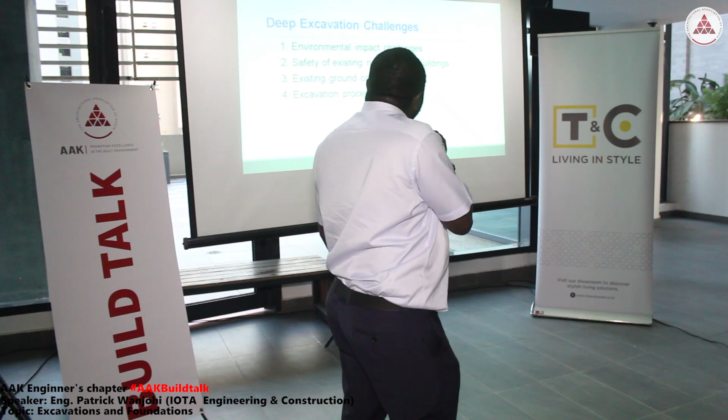This is a big topic we cannot exhaust even given a day. We need serious thought about the environment when it comes to removal of material from one place to another, because material is never destroyed, it is just relocated. Everybody needs to think about this for us to have a good environment now and into the future, and perhaps allow enough time during excavation so people can find different uses for the material, so it doesn't clog areas where we'd dump what we don't need.

Another challenge we always see is when there are very close structures previously built, and now we also want to go below their foundations. This is a big item, and people worry: what is going to happen to my structure, or to this structure that doesn't belong to me? Will there be a legal issue coming up? It's a big worry for everybody, and people think hard about it, but solutions are there, so we're going to look at those solutions.

The other nominal challenges we have to come across during deep foundation development are things like material hardness. Sometimes we find the materials are too hard, and we don't know how to deal with it, which means more cost. So sometimes we have to think about what equipment to employ to make it cheaper. It's never very cheap, but somehow it's well done.

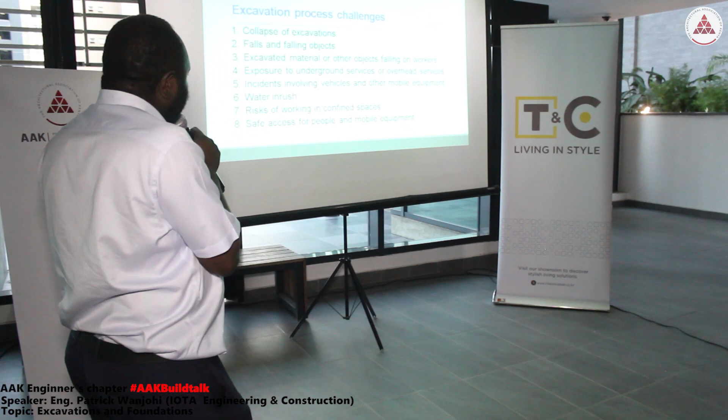Water inrush again, and confined spaces, this is also another big challenge - safe access for people and mobile equipment. Normally as you go deep, the chances of having a wide road reduce, which means there must be inherent interaction of equipment and people. A lot of care must be taken - what should be done there? This is another big issue.

Okay, let's see the solutions to these numerous problems that we have mentioned. I hope this is going to be useful now and into the future.

We could also have the solution of lateral support by battering, cutting the sides when they are inclined. This is scientific - there are specific angles for different materials to make sure the material doesn't slide down. Different materials require different slopes; some require only a small slope, others require a big slope.

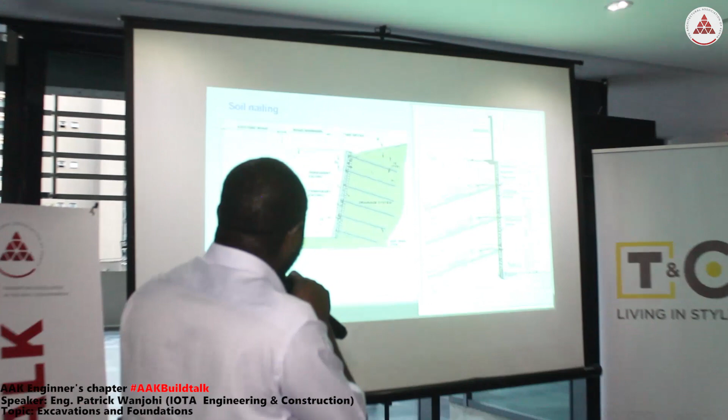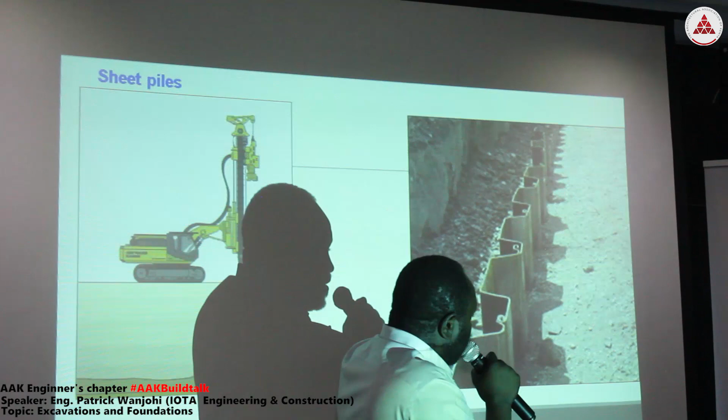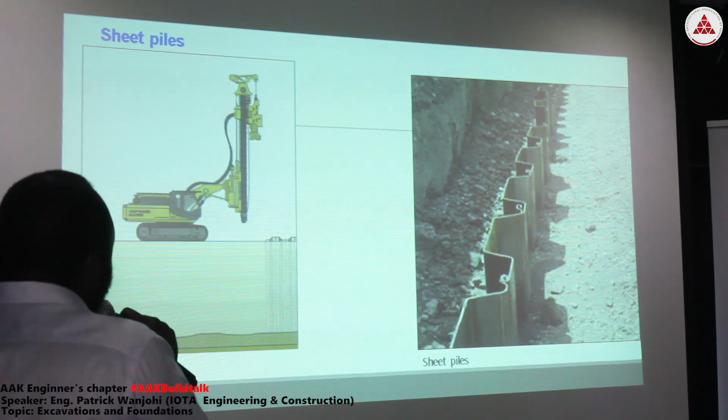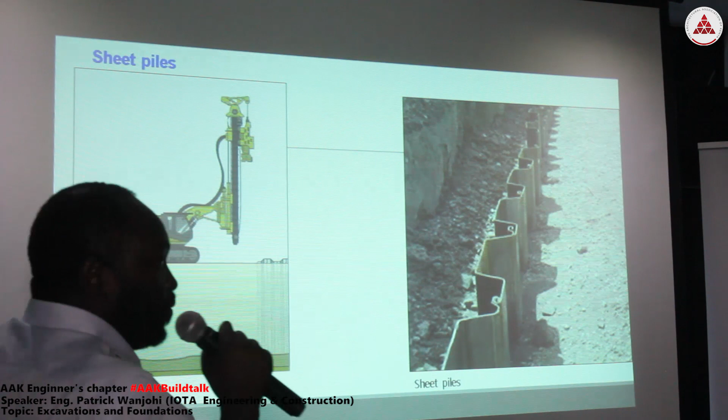Another system that is also waterproof - I could have water on one side and no water on the other side - is sheet pile. A sheet pile also requires a bit of design, and sometimes it has to be reinforced with waler beams and this kind of thing, and we need specialized equipment to drive in sheet pile. Simpler equipment are also available, and most of the equipment we're mentioning here is available in Kenya today.

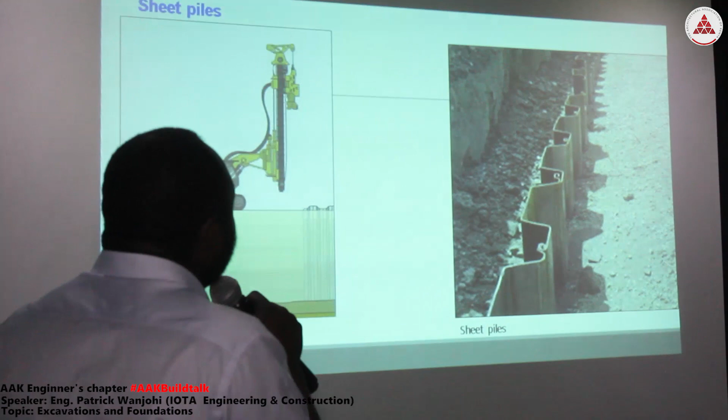So the situation is improving every day - it's not like 10 years before when we didn't have the equipment. A typical case of sheet pile - this is especially good when you are doing bridges on river banks and seashores, or if you also build on the riparian.

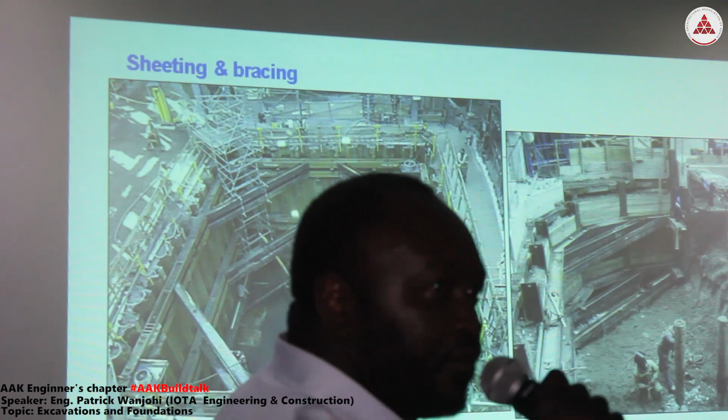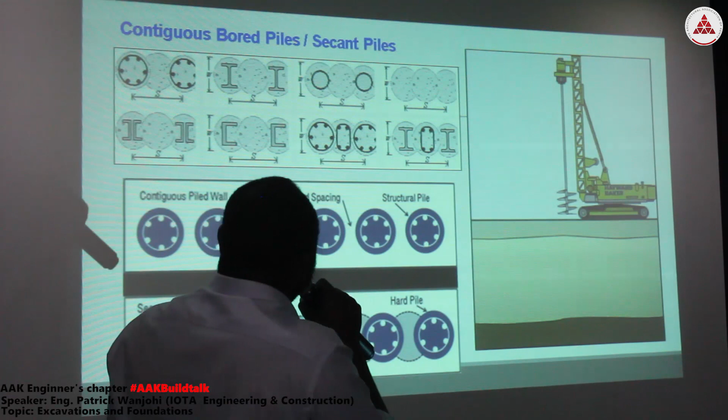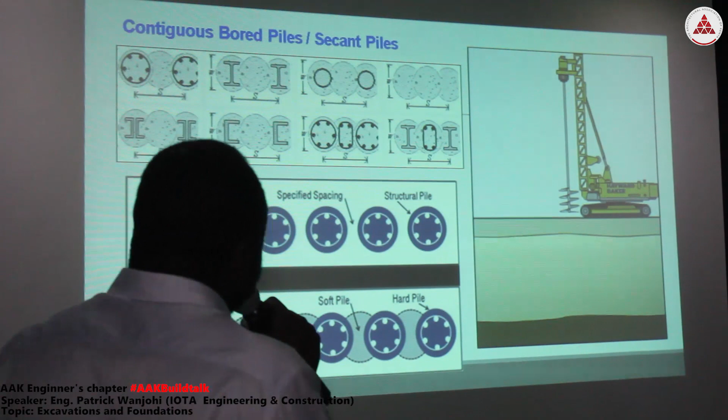The walls can be even more complicated, but combining the same things - you can have different piles, some reinforced, others not reinforced, different kinds of reinforcement, different spacing. We give them different names, but they're basically a pile system.

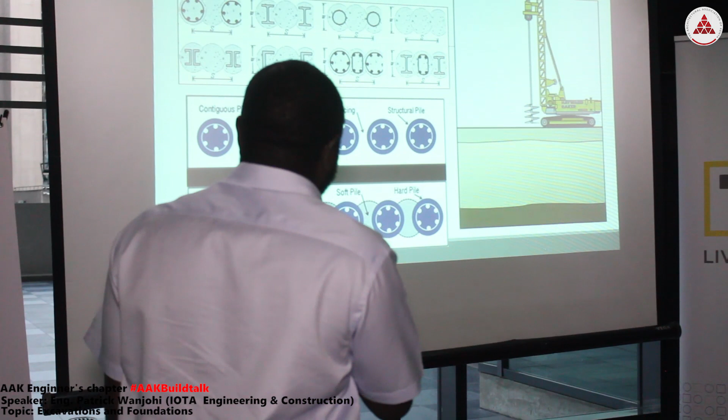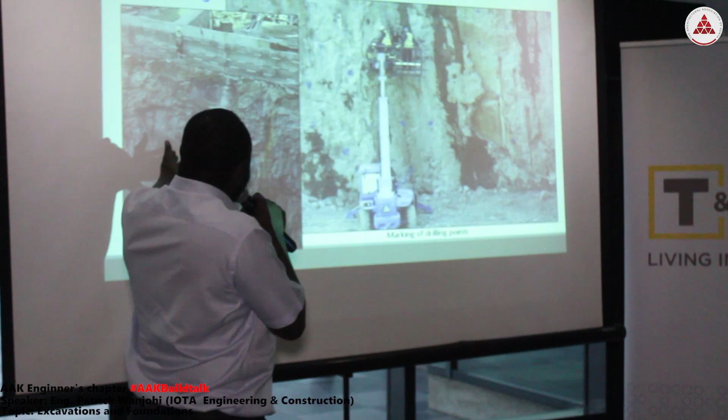Sometimes the piles can be supported by anchors to give them lateral strength. And rock bolting - this is used when you have really hard material that has fractures which may cause movement and injury to people, and sometimes can be catastrophic because the neighbor's property can end up in your pit.

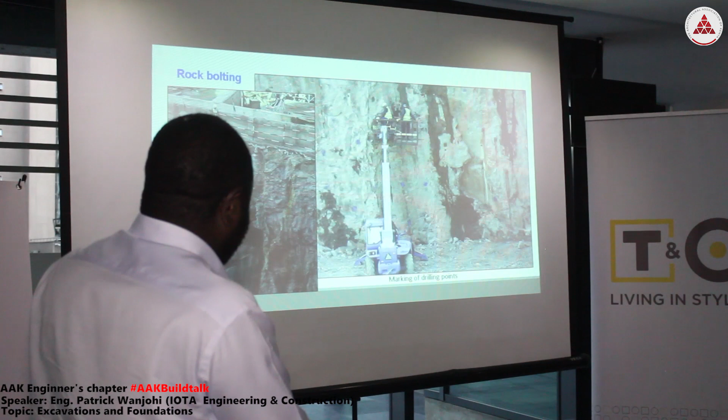It's also a bit of a scientific activity, and depending on the fracture index, the bolts can be very deep and the diameters can be big. The bolts can be small diameter, 12 millimeter up to 32, 45 millimeter - we've seen such large bolts. They can be as short as 2 meters, or as deep as 16 meters, as we've done here in Kenya.

There's a combination of the same things we mentioned - this is foundation on piles, actually 30 meters. Is this the middle section?

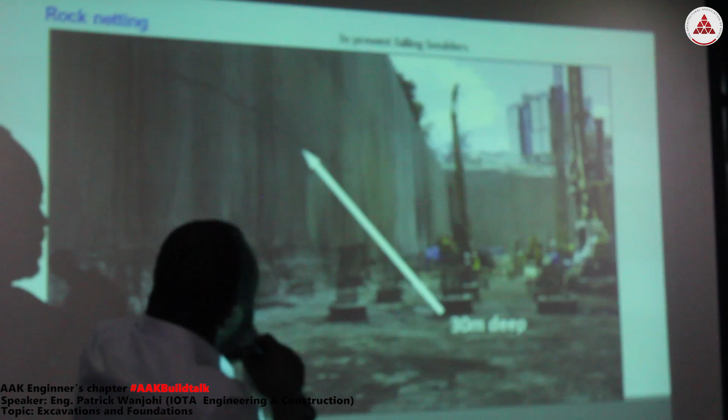It's surprising how nature can be - the material was very hard, but when we arrived here, there was need for piling, and 1 billion shillings was sunk into the piles - maybe just short of 1 billion.

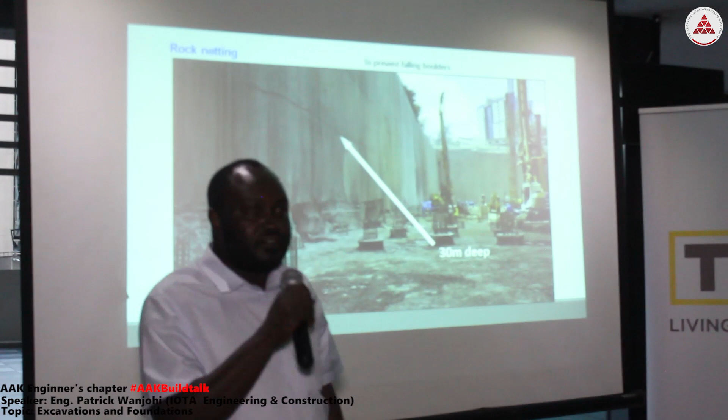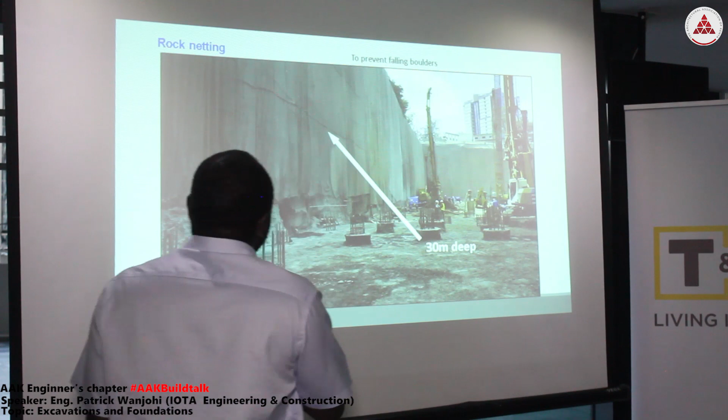1 hectare coverage. Yes, 2.5 acre. Yes, 1 hectare.

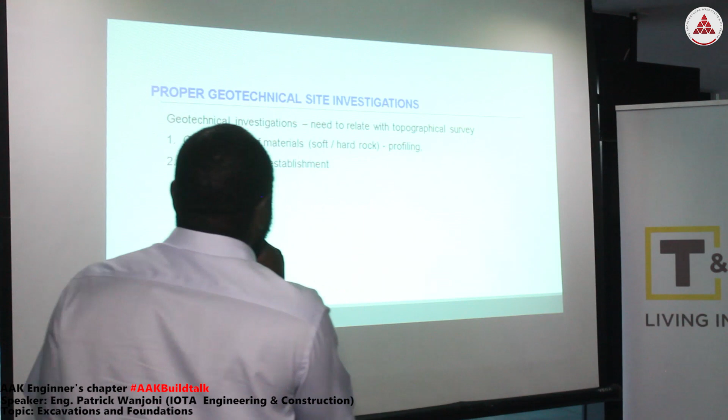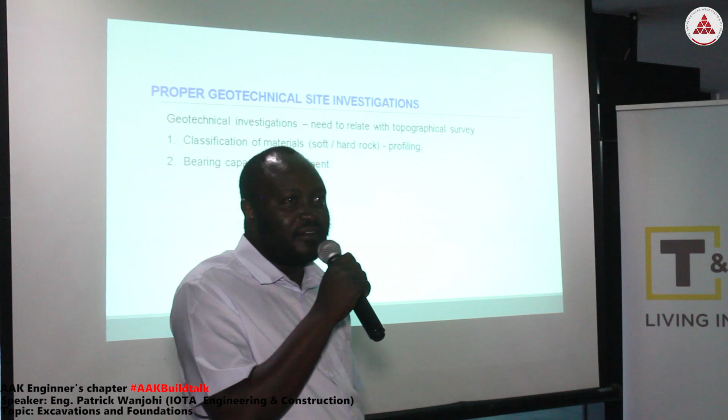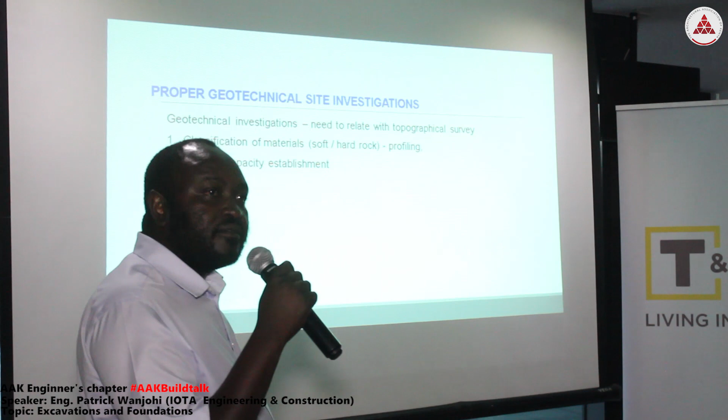The other solution to the challenges of excavation, and this is most basic, is the scientific finding out of the geological strata. We call it geotechnical investigations, and this is very important to control the ultimate cost of construction at the foundation level, and even to predict it right, so that we have good planning by the owners of the money and the owners of the construction.

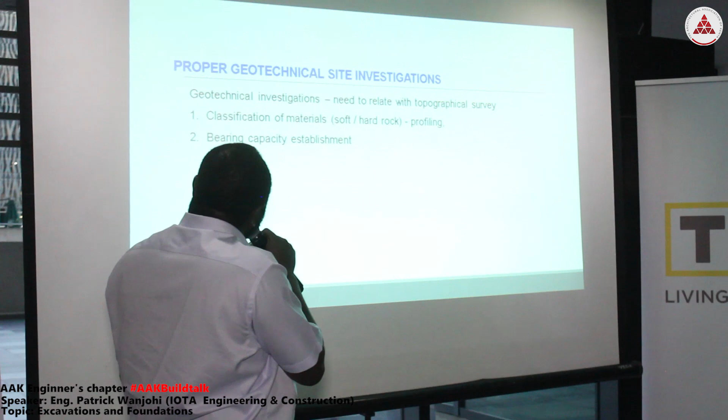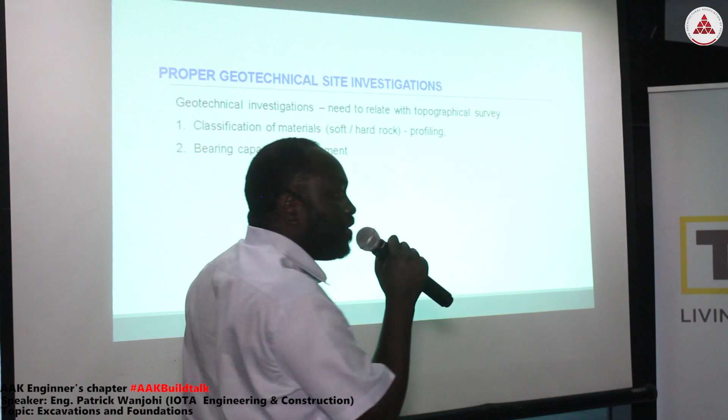The purposes of geotechnical investigations are basically classification of materials for costing, and what we call profiling. I will show that profiling in a short moment. Of course, also determination of... okay, no problem, thank you.

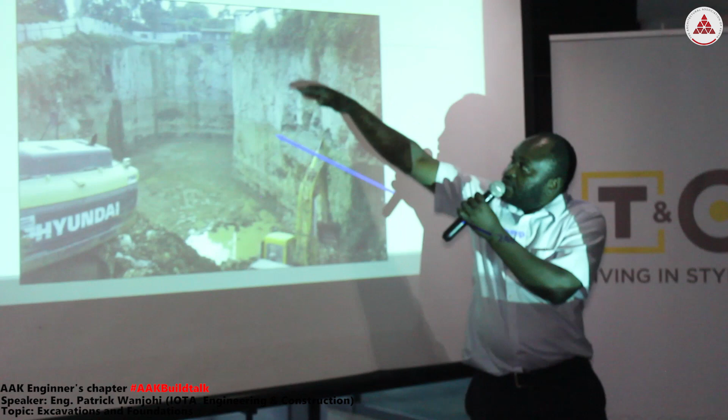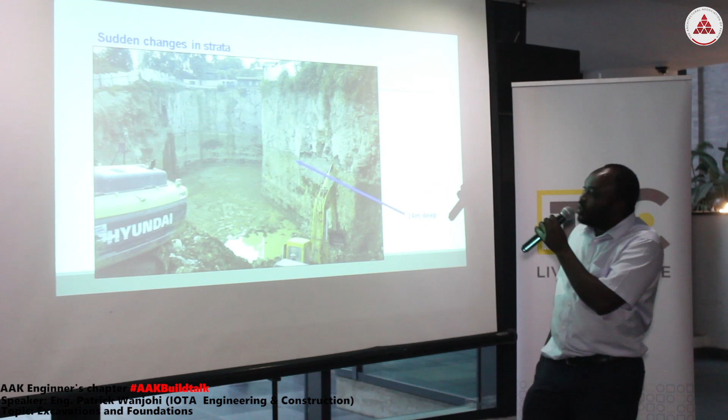So if you see, material can change fast. You had very good material, like this one, maybe up to 80 MPa, and all of a sudden, around the whole site, you arrive at material that cannot even meet 10 MPa requirement to support even a small structure, yet you had material that was very hard at the top. This is supposed to be determined by good geotechnical investigation, and also to inform the construction beforehand what to do with this kind of situation.

What we mean by profiling is like this: the ground is not even, some places are deeper than others. So when you do just a borehole at one point, you might not be able to relate at what depth is this material the same in each of the boreholes. So there is need to do a survey, the topographical survey, and relate that information with the geotechnical information regarding the depth, so that you are able to come up with something that the engineers can depend on.

You end up with a situation that informs you: on this side I have hard material, somewhere in the middle, so what best measures can I do? This is very, very important, again, in cost control.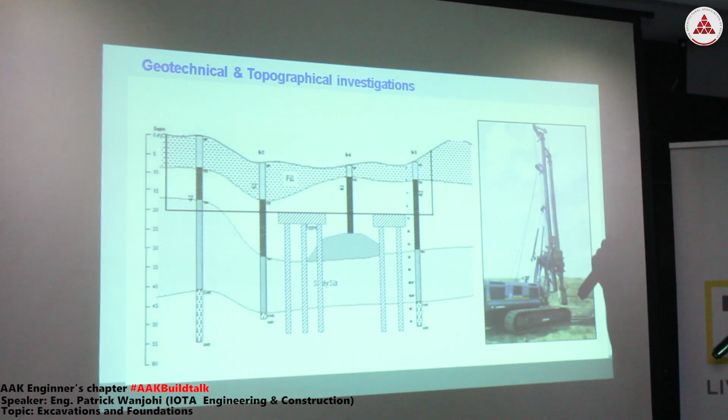One case here that we just developed, we could see a site of this nature. It is not unusual to have it like we just showed elsewhere. You might see that on one side you have good material to support your construction, other areas you don't have good material and you really don't want to go deep. Like we said, the other challenges of excavation can be overwhelming.

So you can make a plan beforehand what to do. Decide: I will use my normal pads, and in the center I will use piled foundations to support the structure. Some of these things need to be seen before excavation, because some of the solutions you need will be provided by monsters like this one. A 70-ton monster cannot be put in a deep hole and you don't know how to remove it.

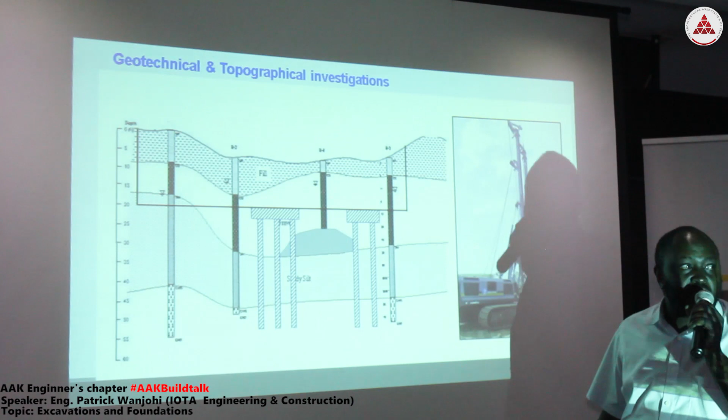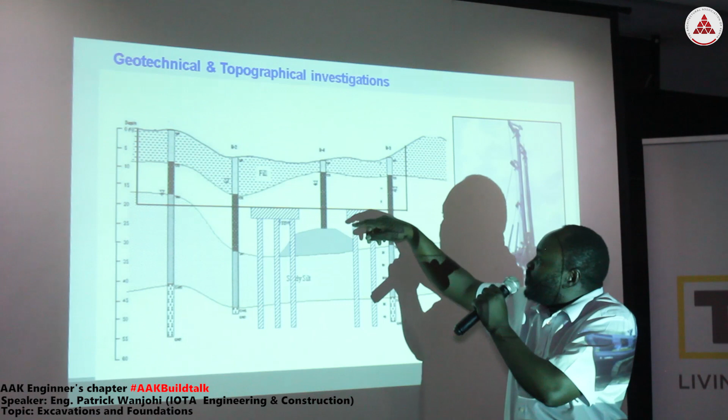So sometimes you might have to do the drilling from the top, remove the machine, and then do the drilling and installation of the pile from the top. That part now you can do when you have opened up, because that needs much lighter equipment, the ordinary construction equipment that we are using all over.

So good planning, guided by geotechnical and topographical investigations, is good for construction, especially when it has to be deep and especially when it has to be tall. The skyscrapers like where we are, I'm sure the engineers did a lot of work even where we are.

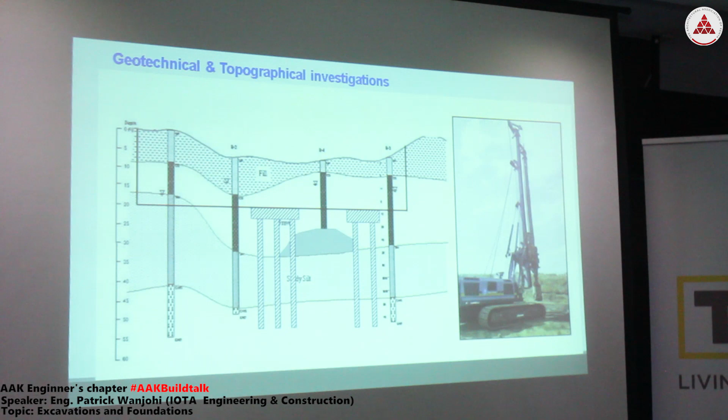I'd like to make a quick comment also. Now, it looks easy when presented, but it is not easy, and this makes me think that these kinds of subjects now need to be taken to the roots of our profession, being in the school, so that we are able to have an interaction of the industry and the developments that we are going to be having from now onwards.

And maybe probably to ask AAK to listen to our universities, so that we have much more quality graduates who understand more, who appreciate more, who can save the industry much more.

There is a good way of doing it. It's about understanding the equipment. Everything boils down to equipment, availability of equipment, and not just the equipment but also the expertise to do it safely, because construction is all about improving the quality of our life. So when we lose a life, we have lost the whole point. I would let AAK deal with that, and where we can as individuals, we also do. Thank you so much.

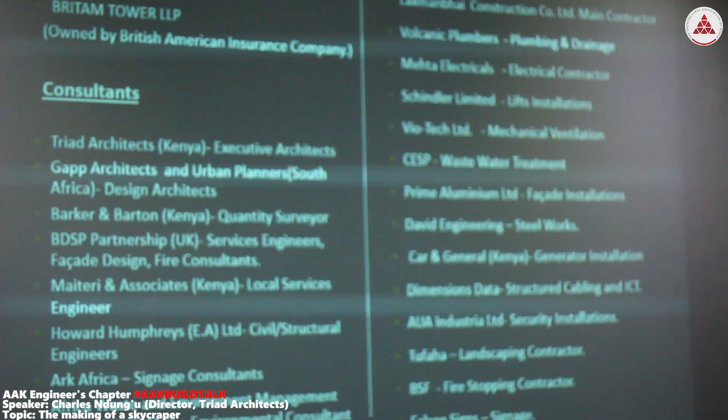I know we have Howard Humphreys, the engineers, Atkins Global, Edward and Pauline, who are the structural engineers. We also have two architects from our office, Stephen Luta and Iqbal Singh. Iqbal was the architect and Luta joined him a bit later.

But that said, the team was large. As listed, we are the consultants, Triad Architects, working with a company in South Africa called Gapp, who we are associated with.

Quantity surveyors were Barker and Barton. We had engineers from the UK called BDSP Partnership, doing the services engineering, fire studies and facade engineering. We also had Maiteri and Associates, local engineers, and Howard Humphreys as mentioned. We also had a signage designer.

The signage you see, the pylon at the beginning, the signage up to the ducts, and the parking silo were done by Ark. And we also had an environmental consultant called Awemark.

On the contractor side, the main contractor was Laxmanbhai, who we settled on after an extensive review of the tenders that we received.

We had quite a competitive tender. At the end of the day we remained with two contractors in the ring, Laxmanbhai and a Chinese contractor. But after visiting, even going into China to see the Chinese work, it was deemed that Laxmanbhai would achieve the best quality. So we selected Laxmanbhai, and I think they did not let us down.

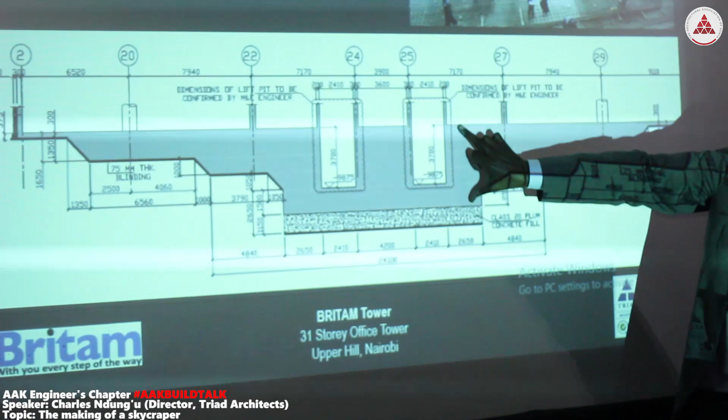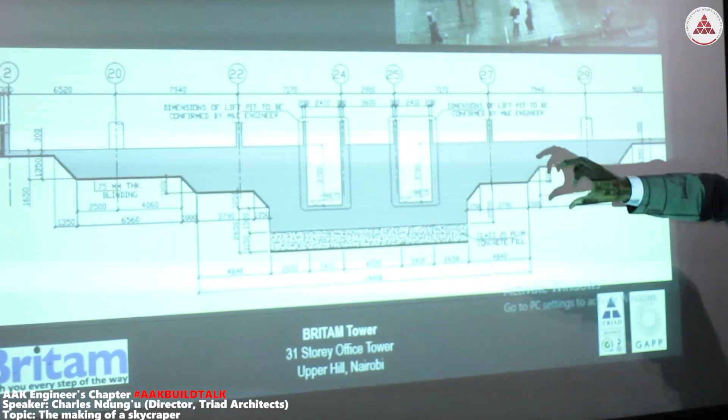What I've shown here is the tower raft, which at its deepest position, at the center, is 5.2 meters. So it's basically concrete, 5.2 meters high, heavily reinforced. Then it tails down to that area, which is 2.6 meters high, plum concrete, class 20 I believe. And then the smallest part of the tower raft is 1.6 meters.

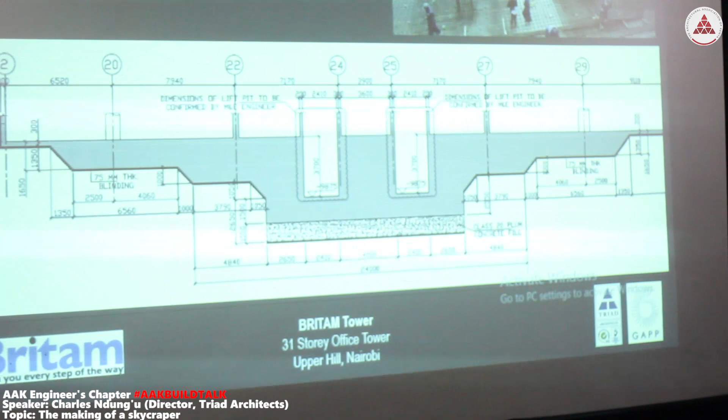The silo also has a raft, but a bit smaller in thickness than this. We did not encounter too many challenges in terms of the edges. They were fairly stable. In some areas the rock here is quite high; I think the soil was 1.5 to 1.6 meters, or 2 around there. So we did not have a lot of danger of the sides falling off. But in some areas we had to hold back the soil with some mesh and some lean concrete. So we didn't have any serious problems with the foundations.

What you see at the center there are the lift pits, and that's the lift lobby, actually, at the center. So that was the foundations and concrete.

In terms of how the building design was arrived at, the client wanted an iconic building. Some people say iconic is simple, and that principle was taken into account. The Britam Tower is actually a very simple building. The idea was to have a building that tapers off to an apex, like Mount Kenya — so the inspiration was Mount Kenya, representing strength and stability because it's rock. We also felt the design would age gracefully and be attractive even in the future. So that was the inspiration.

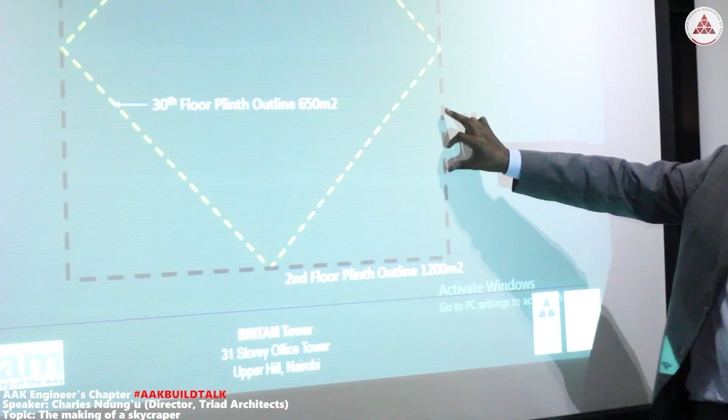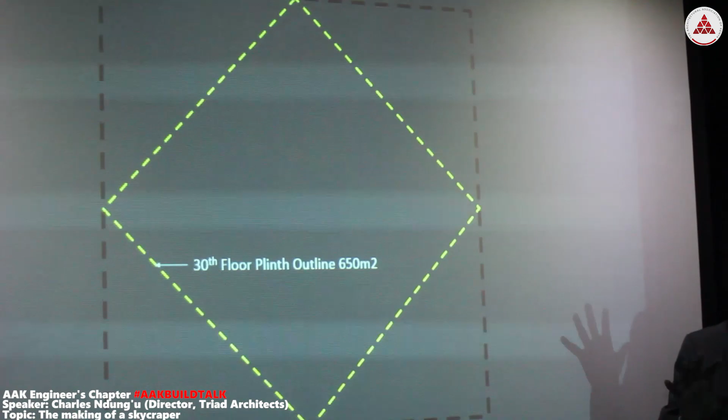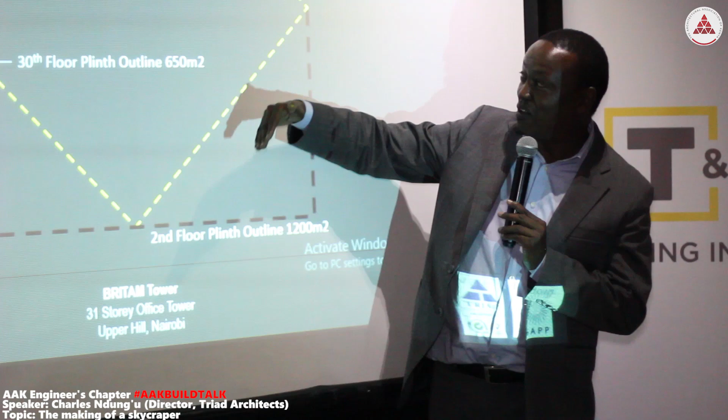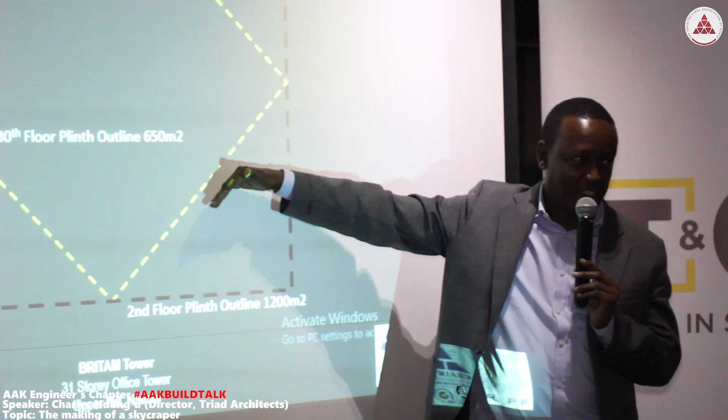Those are some of the initial sketches that were done. This diagram explains the simple design of the tower. It starts with the ground and first floor up to the second floor being a perfect square of about 34 by 34 meters — the outer line you see is the outline of the lower floors up to the second. Then for the floors after that, the corners are chamfered back equally on all 4 corners, each floor, until by the 30th floor you have another perfect square sitting across the big square. The footprint of the 30th floor is what you see in yellow.

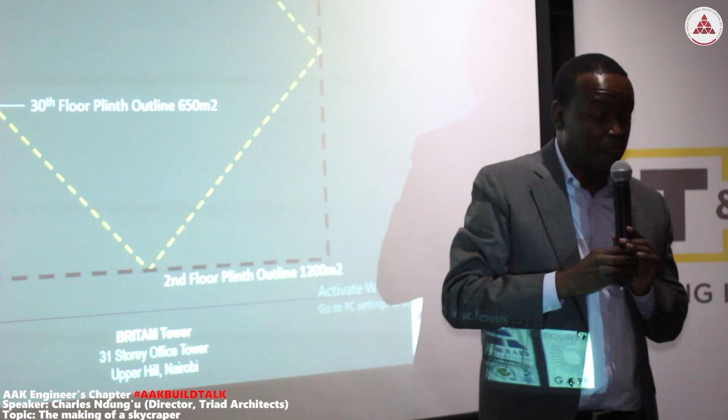Through that, the building may appear as though the floors are moving, or irregular in shape in some areas, but actually it's a very simple concept. The design, other than being a very tall building, the geometry is actually quite simple. It doesn't look so because of the chamfers, but it's actually quite a simple plan.

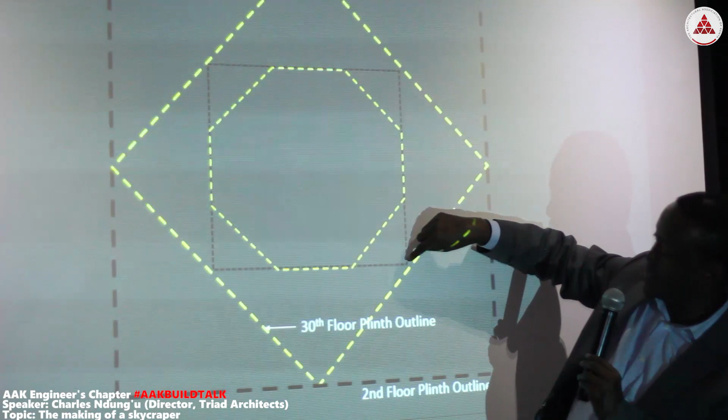Then on that, we have the core. The core for the tower, the lower part up to the 20th floor, is basically a square, with that being the outline. Then the core of the 20th floor and above changes because the chamfers start reaching the core, so you have to move it back. So the core becomes an octagon from the 20th floor.

Also, up to the 20th floor we have 8 lifts. But from the 21st up to the 30th, only 4 of the lifts go up, because you cannot fit them within that smaller footprint, and you also don't need 8 lifts.

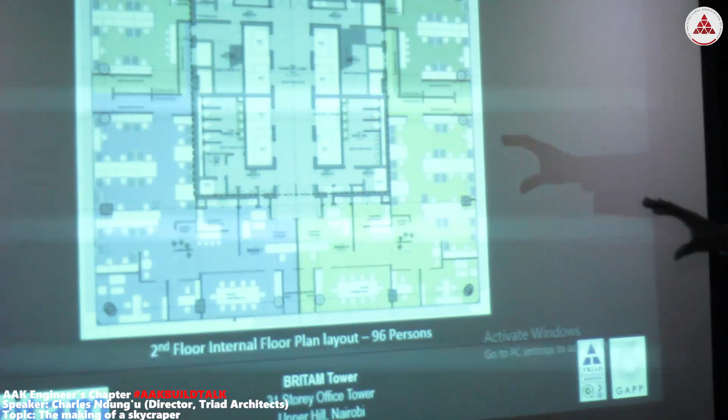This is a typical plan design we did for how the 2nd floor could be fitted, and it showed that you can comfortably fit 96 people using desks of 1.6 to 1.8 meters. If you go down to 1.4, you could even go up to 110 people per floor on each of the lower floors. It has a core, 4 lifts, and 2 staircases.

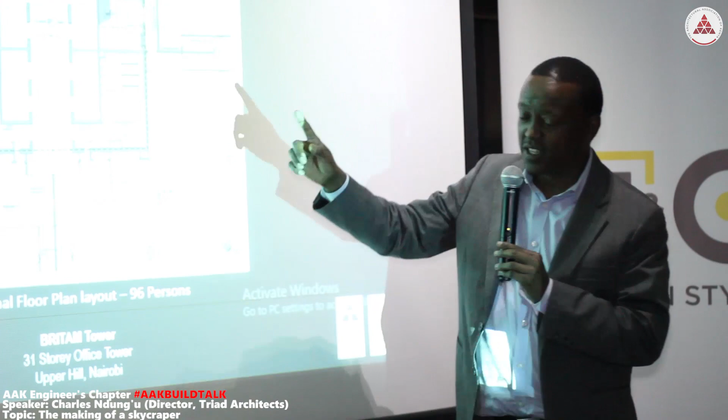We didn't go into detail on the escape staircases, but the bathrooms are basically behind the core. This core is a main structural element of the building. The walls are 400mm thick concrete walls. These outer walls are all 400 thick, and we don't have columns there. All the columns are peripheral, and they go back and support on that central core.

When we go to the upper levels, 20th floor and above, the core wall thickness goes down to 300 millimeters, and again we are using class 40 and 45 concrete. That is the top floor, with the core at the center, and 2 lifts.

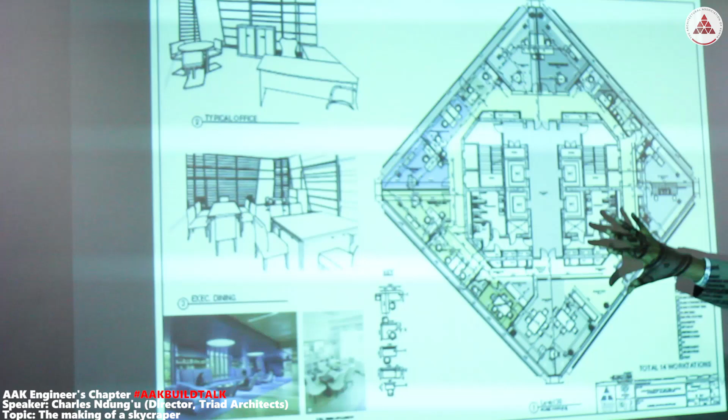This actually is a design of a fit-out currently being done for Britam, who are going to be occupying the 28th, 29th, and 30th floors. So this is going to be one of their spaces.

On this, during design, because there were a lot of questions about how efficient that floor is, the design could fit about 60 people. Britam is a bit generous because they have a lot of other dining areas and kitchens, so the people are less, but you can actually fit about 60 people on the top floor of the building.

Overall, this building is designed to take 2,500 occupants, or thereabout.

The tower is a concrete structure with a core, as we've mentioned. The facade has basically 2 skins. We have the curtain walling as the inner skin, and then we have the terracotta baguettes.

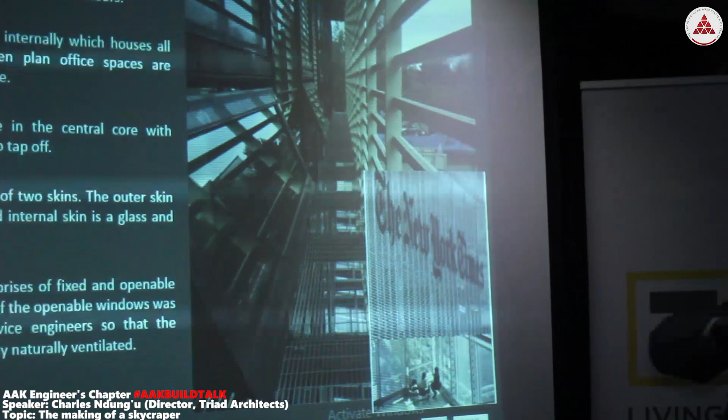Terracotta baguettes are basically special screens; the baguette itself is made out of a special clay that is burnt to a very high temperature. These are made in Germany, and terracotta is one of the materials that is becoming commonly used, not only for screens but also for facade cladding. A lot of buildings in Europe and the US are cladded with terracotta panels.

This is from a company most of us have heard about, NBK, Hunter Douglas. They supplied these baguettes, which are supported on an aluminum frame. The purpose of the baguettes is to screen the curtain walling because of ambient temperatures and those kinds of things. So a design was done that optimized the type of glass used, which is high performance glass, working in sync with the baguettes.

Things like the spacing of the baguettes, which is 200mm spacing, were optimized based on the facade and glass design that had been done, even down to the openings. As I said, we had facade engineers in the UK, and for curtain wall buildings, where you have extensive curtain walls, we'd advise that you look at getting facade consultants.

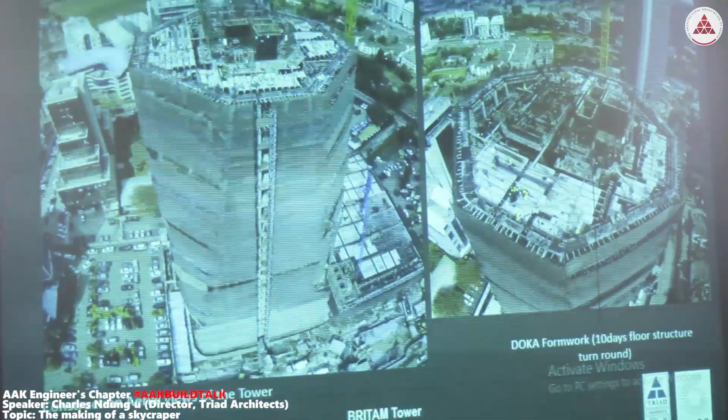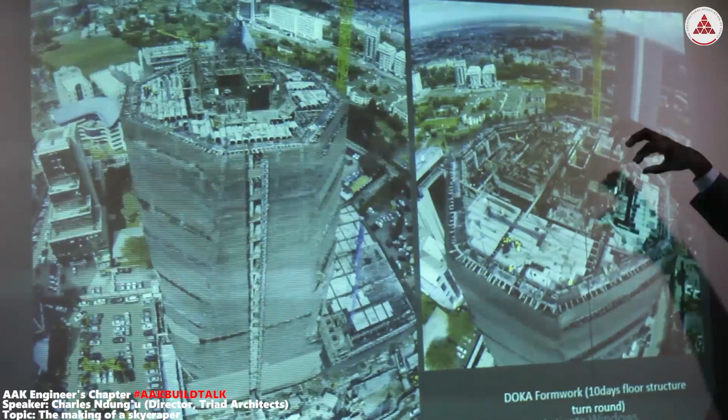Another feature of construction, and this happens a lot with high-rise buildings, is how do you build them fast, how do you build the core? There are various technologies out there. In this particular one, the contractor engaged a company from Central Europe that provides a mechanically movable formwork called DOKA formwork. Once they cast a floor, they would loosen it, and it would be mechanically raised to the next level. Because of that technology, at the peak they were able to cast 3 floors in a month, so they are doing 10, 11, 12 days per floor.

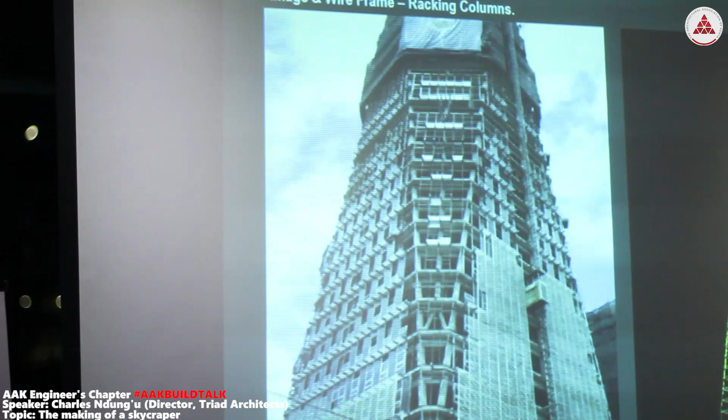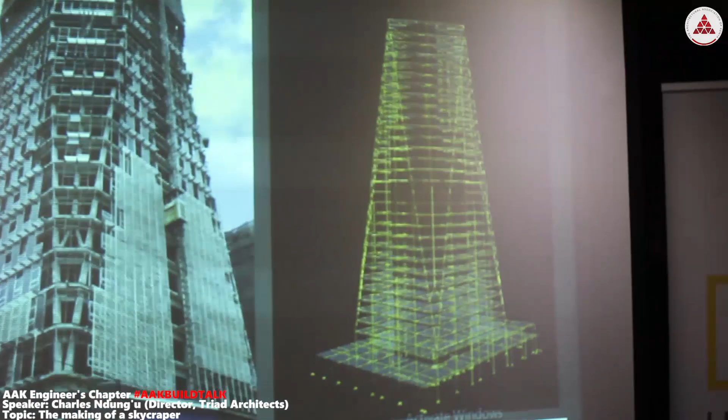Another structural feature, the engineers probably would explain this better, but because of the chamfering of the corners there was a structural challenge because your columns cannot go up as the corners are moving back, and that necessitated design of angled columns, which you can see here at the corner. They start angling, and then it reaches a point, as Engineer Goro observed, where you cannot span the slab between those 2 slanting columns because they are too far apart. So other columns were introduced, running from those 2 main columns, meeting a floor above, and then another column going up the building supported that. Those angled columns were probably the biggest design challenge from the engineers, but I think they were up to it.

They have the latest technologies. One other thing you always do with high-rise buildings is peer review, especially of the structural work, from other engineers. So the engineers are working with another engineer to review what they are doing, because you really have to get it right and not have any catastrophe.

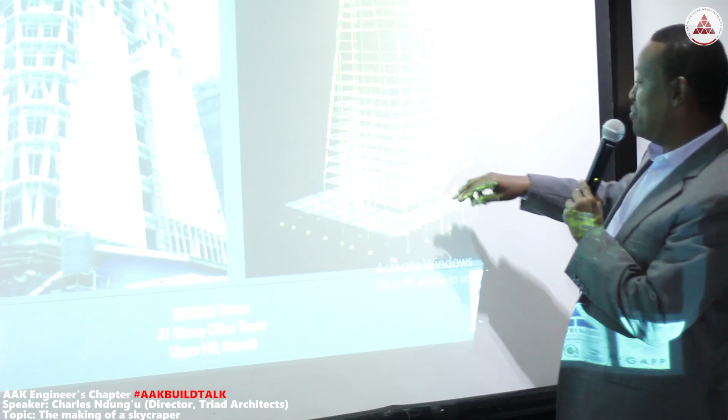That is one of the wireframes from their models, and you can see those columns springing up. The columns at each corner, this corner and the other corner, actually go and meet at the top, because now we have a perfect square at the top. Because of that, the last floor could not be concrete, the top roof that we saw is steel, because those columns ended at the 30th floor. Above that, we took 1 floor of steel.

Now the curtain walling, the baguettes, have come up. The other big feature of this building, and what actually gave us probably the most headache, Iqbal is here and he'll probably agree with me, was how to put up that spire.

Initially, the spire was designed to host wind turbines, and these wind turbines were supposed to generate electricity. That was the thinking. If you look at some of the initial models of the building, I think even the one downstairs has those turbines. A supplier had been identified from the US, and initial discussions were held. But as we went further with the design of the spire and looked at these turbines, we started doing cost-benefit analysis. It came out that the power the turbines were generating was going to be less than 1% of the building's requirement, so it couldn't even power the lobbies alone. Because of that, the client asked, what is the payback time? When that was done, it came back to something like 86 years.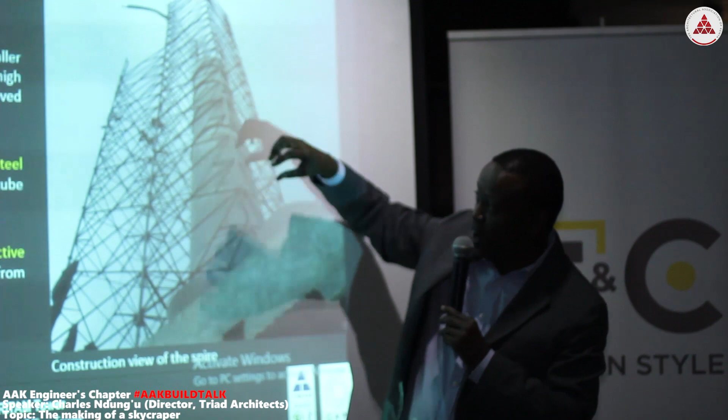What you see there is the scaffolding. The spire is 62 meters, but this scaffolding built to enable the workers to work on it was 84 meters — close to 20 meters above the top of the spire.

You can imagine the workers had to go up every morning when the weather was chilly, or wait a bit because it gets very, very cold. They had to wear warm jackets and all that. So that actually proved to be a huge challenge.

But eventually it was done, and it became one of the elements that make the building iconic, if not the tallest building.

Then the other thing was how to protect it from weather. We looked at galvanizing and various other ways of doing it. Eventually we arrived at a product called Zinga protective film, which has been applied to make sure it doesn't corrode.

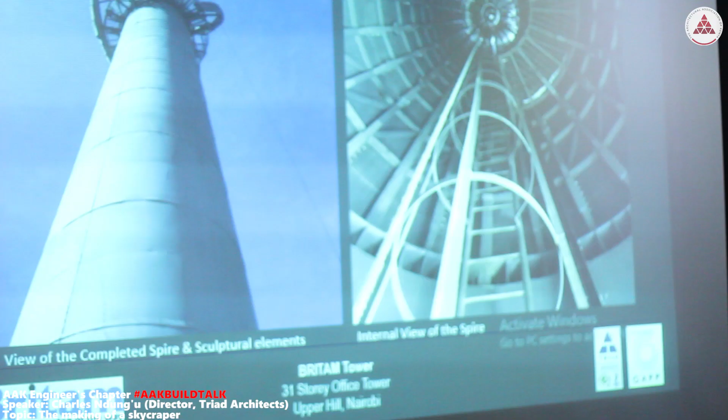That is the same spire, with a picture taken. Those are fabrication pictures of the steelwork in the yard. And that is the inside — this picture shows the inside of that spire.

What you see, some of you who are brave enough probably went in. I'll admit I've never been to the top, but that's what you see — you can actually walk up to the very top, and there are platforms you can walk out onto and stand and look at the city, now at almost 200 meters height.

What you see there is the first platform. There's a second one, and another at the very top. There are doors from inside that you can open and go onto that platform. Of course, they are not meant for people viewing — it's for maintenance. Then other things, the atrium — I won't go too much into that.

Glass, special glass at the top. A lot of the glass up there is toughened glass, fritted to reduce the light coming in.

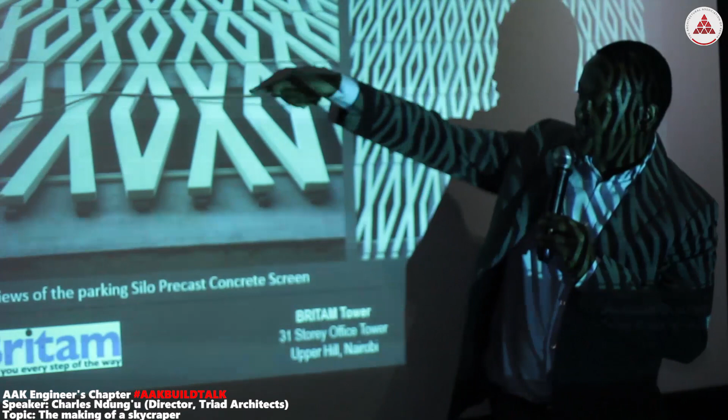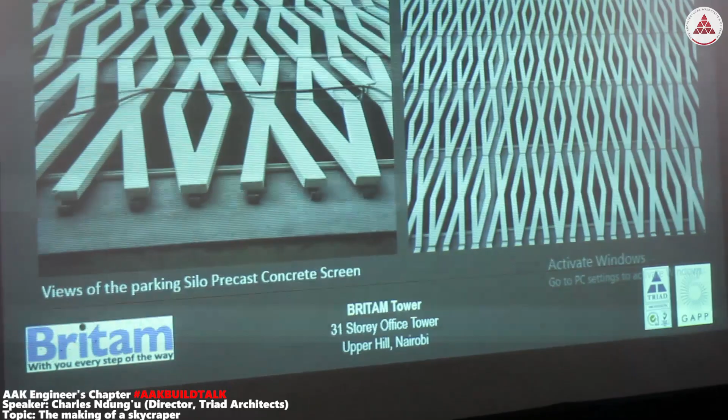The parking silo — I think the biggest feature is that those screens you see are basically precast concrete screens, precast in panels and then fixed between each floor. If you look at them, there are just three types of precast concrete panels: one forms an O, another forms an X, and the other, which you can't see yet at the ends, forms a V.

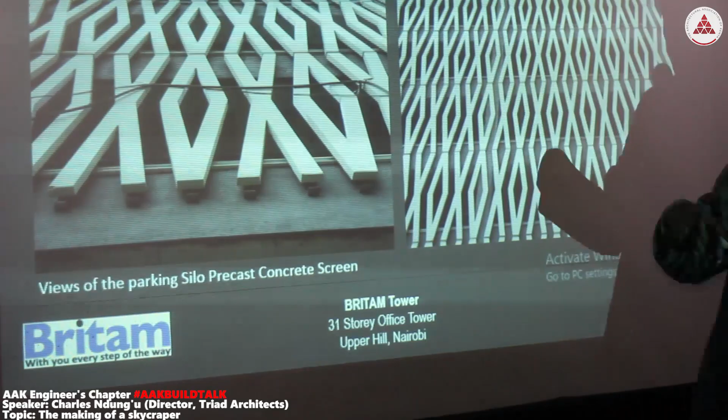And between those three panel types, that kind of feature was able to be created.

Some of the other challenges were that when we started these developments, the restriction in Upper Hill was 15 floors — you could not build more than that. There was a lot of lobbying on this, as the restriction was due to issues of air traffic and so on. But after a lot of lobbying and discussions with KCAA, including even the Air Force, a decision was made to lift the height restrictions in Upper Hill.

So today, those other tall buildings about to overtake Britam owe a lot to Britam, because it was during this lobbying that the government decided to lift restrictions in Upper Hill to a maximum of 350 meters — meaning you could build up to almost 80 or 90 floors.

So again, planning is normally a major issue with tall buildings. Facade.

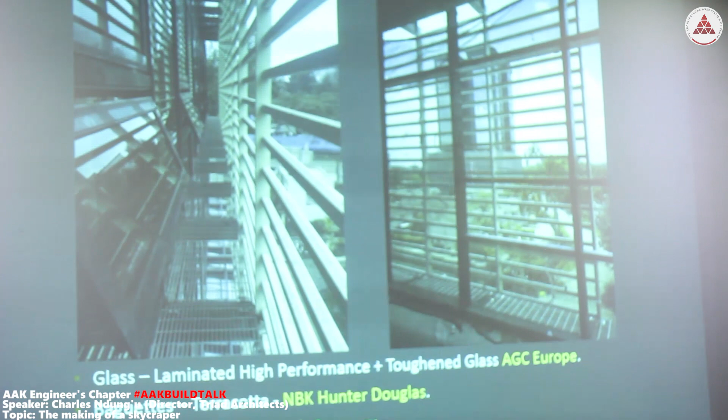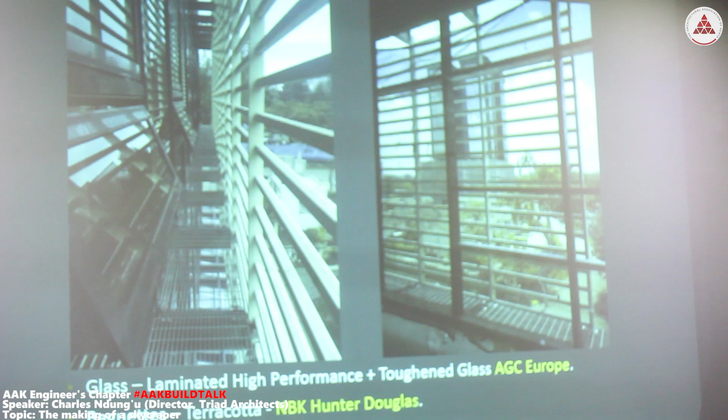I mentioned about the facade design. It's important when you do such a building to ensure the glass works, since it's a glass building. So the first thing you ask is, does glass work in this region? That question has been asked, studies have been done, models have been done, and specifications have been developed to show that it will work. We are all eagerly waiting, the building is not yet occupied, so until it's occupied, that's when we'll truly know. But the studies show that the ambient temperatures in the building are going to be okay.

The challenge with glass is you have to balance two things. One is the amount of light coming in, what we call light transmission, and the second is the ability of the glass to keep out heat, sometimes called the G value, how much heat do you keep out. So you want to have the most light coming in, yet keep out the most heat.

For high performance glasses, there are glasses that allow in above 64% of natural light through the glass, yet keep out 60% of the heat. As you push that glass to be even higher performance, you start incurring the risk of breakage due to heat. So we were treading a fine line, trying to find a glass that won't start breaking, because a lot of this glass keeps out heat by becoming quite hot itself, and it can break, it can just shatter.

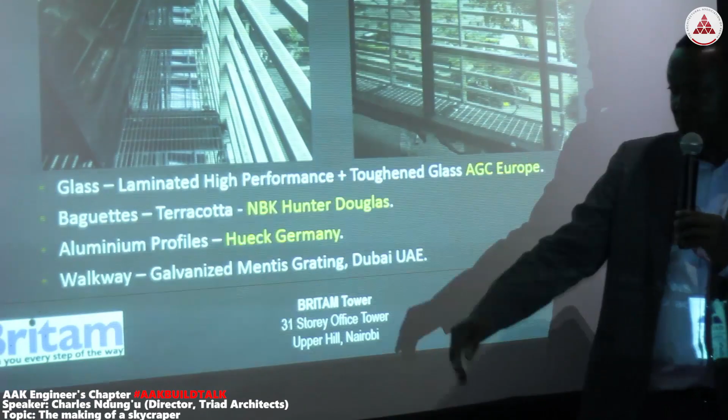But we arrived at this particular glass from AGC Europe. I mentioned the Terracotta was from NBK Hunter Douglas. The aluminium sections and profiles are from a company called Hueck in Germany. And the galvanized walkways that you saw are from the UAE.

There are a lot of safety issues, I won't go into all of them. Accessibility, sustainability, there are a lot of sustainability provisions in this building. Initially we were supposed to look at going for LEED or Green Star. That didn't happen, we later applied for what we call the EDGE rating, which I'm sure most of you know. You'll ask, what are the reasons?

A lot of things. One, recycling of grey water. All the water coming out of the wash basins and the kitchens goes to tanks in the basement below where we are, treated and recycled for use in the WCs and urinals. So this water is being recycled, and a study was done to show that this building is going to save water taken from the mains by close to 60%. We'll be taking 60% less water than if you do not have that system.

Rainwater harvesting, again, we harvest quite a lot of water, there are tanks in the basement. I talked about the environmental studies that were done to ensure the building has a lot of natural light, and sun shading of the facade. Infrared systems in the taps and urinals, all that is infrared.

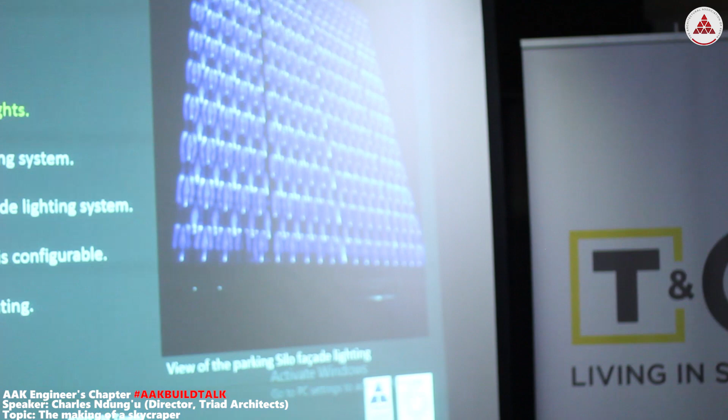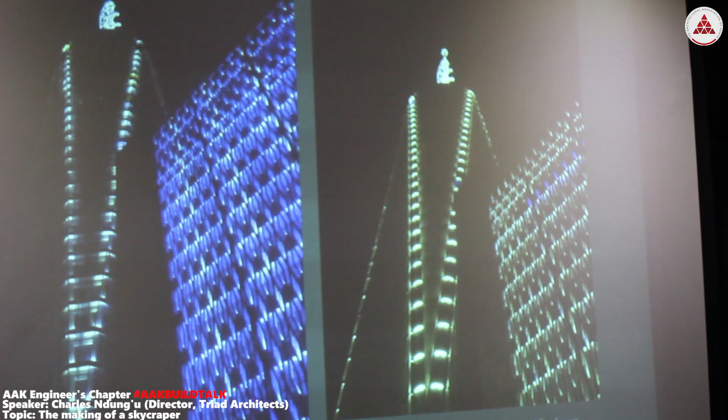And there are many other fire provisions. Facade lighting, I think most of you have seen it - that is also another feature. That is the parking silo, and that changes quite a bit. All of this is programmable and all on LED lights. These are thousands of lights, but energy-wise, not very high consuming. Also the spire, at night if you look at it, has a lighting system. That's another night shot of the various lighting systems.

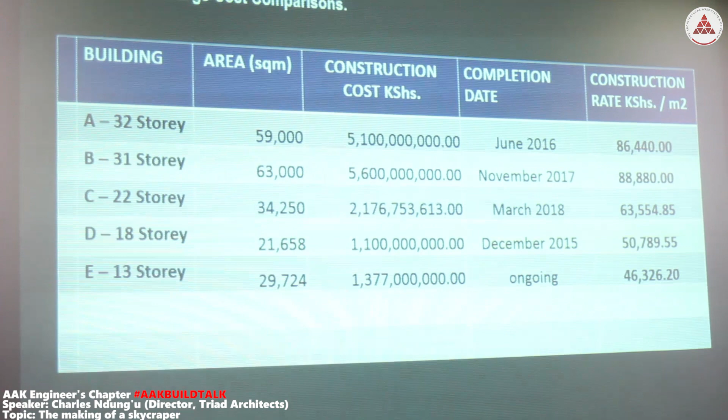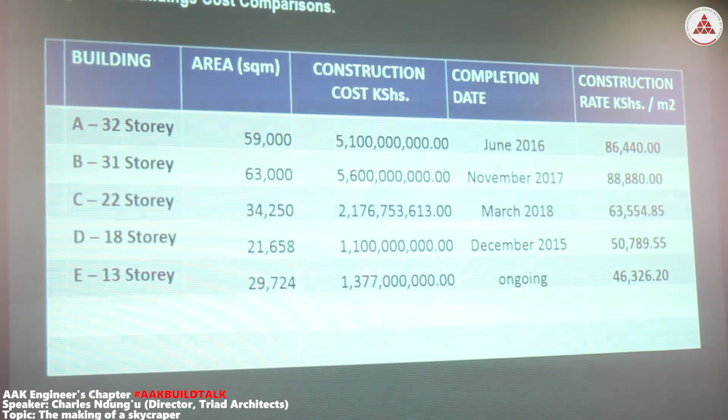One other item I'll mention is that high-rise buildings are costly buildings. The cost is, one, because of the structure - when you're doing rafts with concrete 5 meters deep, and you have columns that are huge to support this building, plus cores, that comes at a cost. The other thing that makes them very expensive is the services - you have to pump water to very high levels, the electrical installations. So these buildings are normally heavy on services.

We did a comparison on some buildings we've been involved in. I won't name them, but I'll just say Tower A is 32 stories, and it's completed - cost per square meter, 86,440 shillings. Tower B is 31 stories, also completed recently, cost per square meter 88,880.

Tower C is 22 stories, so 10 stories lower than the other two, recently completed also this year. Total cost per square meter, 63,554. Tower D is 18 stories, completed in 2015.

Tower D: 50,700 per square meter. And Tower E, 13 stories, ongoing, cost per square meter 46,326. All these are unfitted buildings - only the common areas are fitted. Tenant areas are not fitted, so that cost is not included.